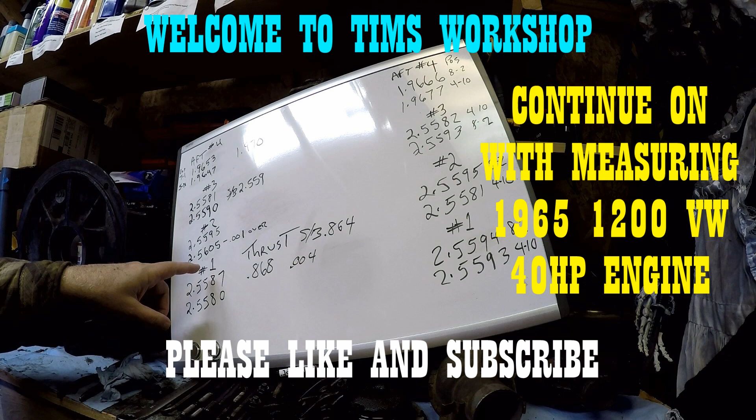We went through and measured the main bearing bores. We need to torque down the case because that's the way it should be done - when they originally bored this thing, they had the case torqued. I'd seen videos too, and was practicing measuring the bores, but I noticed my measurements were kind of goofy. So I remembered you really need to torque these cases down before taking measurements. I did that, and now I've got the measurements written on the board, so we'll go over that. You guys can see how I'm measuring these - I'm using a micrometer and a telescoping gauge, which isn't like using a professional bore gauge tool, but it gives me confidence on where we're at as far as these bore sizes and how to proceed.

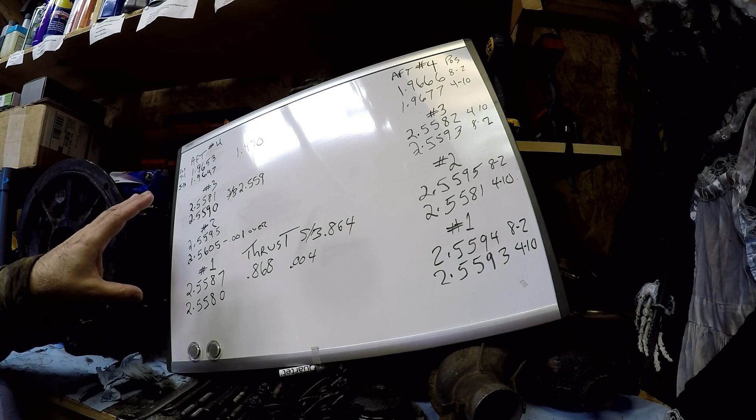We already went through these numbers. I changed this one because I had it wrong - this is actually over by 1/1000ths, which is no big deal, but again, the case wasn't torqued. So what I did to torque it: these 6 main bolts here, I torqued them down to 27 foot-pounds, but make sure you look it up so you know for sure. And then on the front end where the forward bearing is, there's 3 smaller diameter bolts up there that I torqued to 18 foot-pounds. So it was snugged up good, and the bores should be round.

This is what we got, and so we'll compare the two. On the number 1 bearing, here on the flywheel end, we have 25594 and 25593 - it should be 2559, right? So we got that, these are the last digits. Doesn't really make a whole lot of difference on these little numbers here, unless you're off on these - then it does make a difference.

So what we had was 25587, 25580. After torquing this down, the number actually got higher. That means the bearing was in a little bit and not spread out around - that explains it. Also, when I took the measurements, I was taking them at the 7 and 1 o'clock position, and 5 and 11. I changed it over - went to more of a crisscross pattern without hitting the oil hole and the dowel pin hole, from 8 and 2 o'clock to 4 and 10 o'clock. Now our numbers are actually looking really good since I torqued the case down.

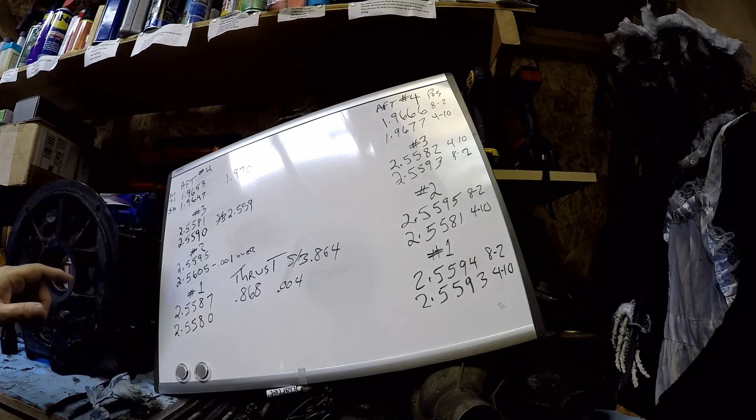Well, the numbers are higher now, which is good because we're closer to the target number. Putting the bolts in by this bearing, the smaller bolts, and torquing them up to 18, somehow my hole size got bigger. It's round now, right, so that explains why it's bigger. You want a clearance of about 2 to 3 thousandths between your bushings and the bores, because oil's got to flow through there.

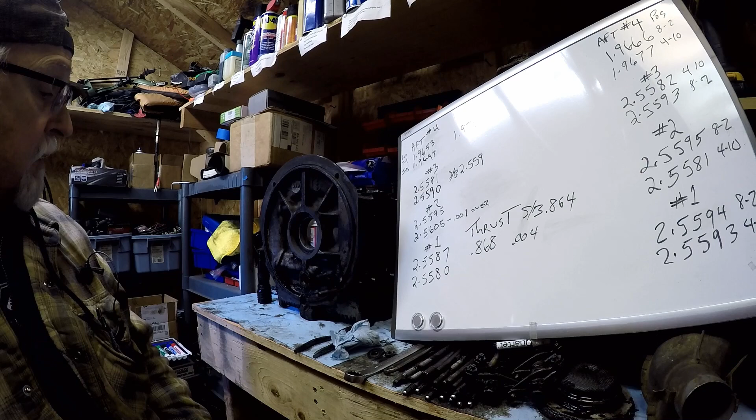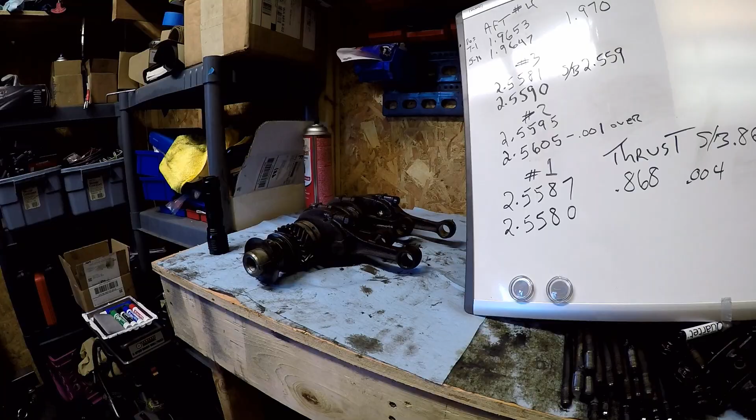So that's what I wanted to go over, these numbers. Now that we know our numbers are better, we're going to get this back off, put it in the stand for now. We're going to take it back apart and clean it better, of course. We're going to get the crankshaft up here and start taking it apart, get the bearings out, and start taking measurements on the crank. On the aft end of that crankshaft, I've got to get that tool to remove the crank gears off. That tool I can get at a fairly good price. Now it's time to start taking some stuff apart here.

Okay, got that out. Got the splash guard off. Got the little crummy bearing off.

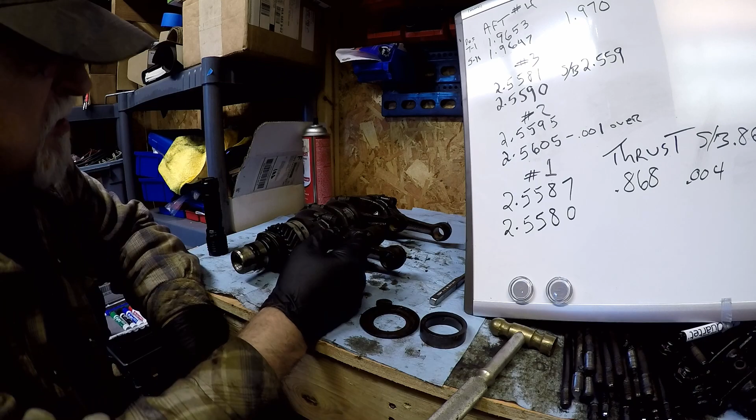Okay, now we're going to take these off. As far as I know, these are all the same length, so it doesn't matter which way they go, other than the fact that this is a match set. The lower cap and the rod, you've got to keep them together, with the bolts. Oh yeah, that works better. There we go. Okay, there's one.

Okay, got that one. That's got a number on it. Has 108, and this is 108 - match set. The reason they do that is they cut this, and once it's cut, these pieces have to stay together for them to work together. If you get them mixed up, they're not a match set anymore, which will cause you problems.

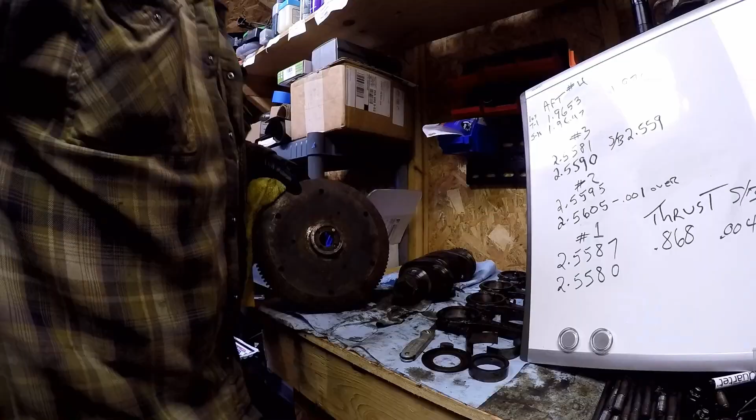Crankshaft is now taken apart, except for the gears. So there is an issue here. These pins on this end of the crank are larger than these pinholes. These pinholes look like a 3/16 diameter, and these look like almost a quarter. This flywheel is not going to work, even though it is a 6-volt flywheel. I'll contact the guy I got this motor from, because he had some other flywheels, so I'll ask him if he has one that matches this crank.

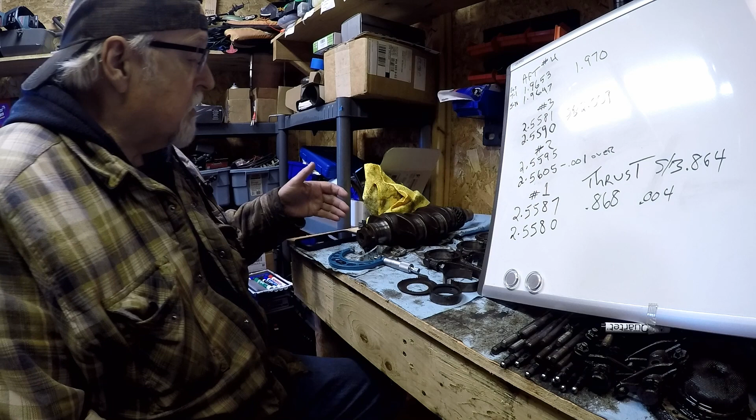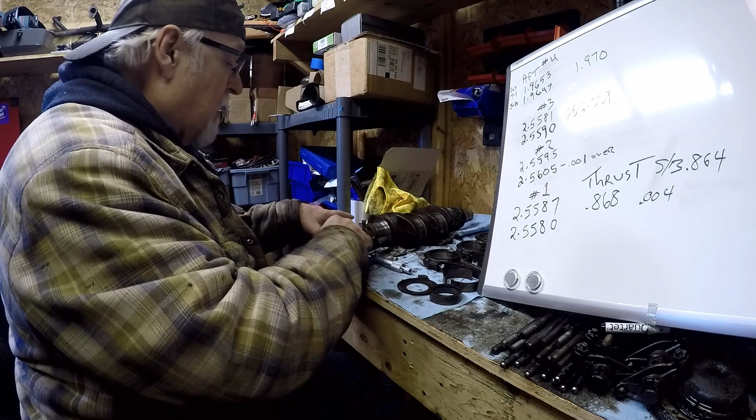We're going to go ahead and measure these journals. This is the first one, so we'll measure it, then the center one, and the end one we can't measure because we've got to get that tool. Let's look up what this is supposed to be.

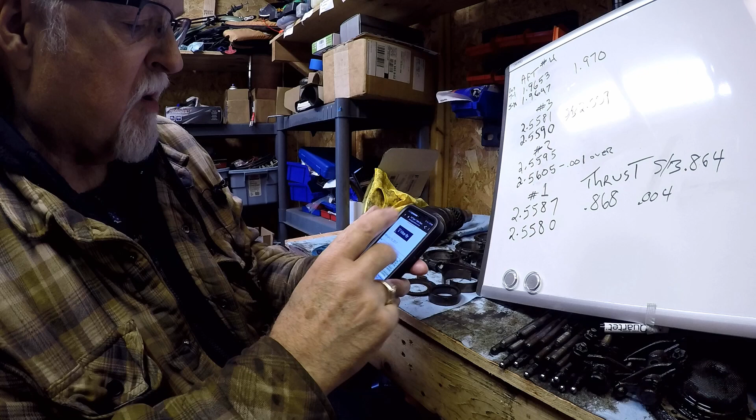Okay, I pulled up the Type 1 main bearing specs off of J-Bugs. It has the information here. Crank measurement should be 2.164. Okay, crank should be 2.164. So, number one, let's see what we got here.

Two, 1, 25, 50, 55, 60, 65, 70, 1, 2, 73, and the last digit is 1. Should be 164, and we are 9 thousandths higher than that.

Let's measure this again, just to make sure. Okay, so we have 2.1, 25, 50, 60, 61, 62, 63, 64, and the last number is 3.

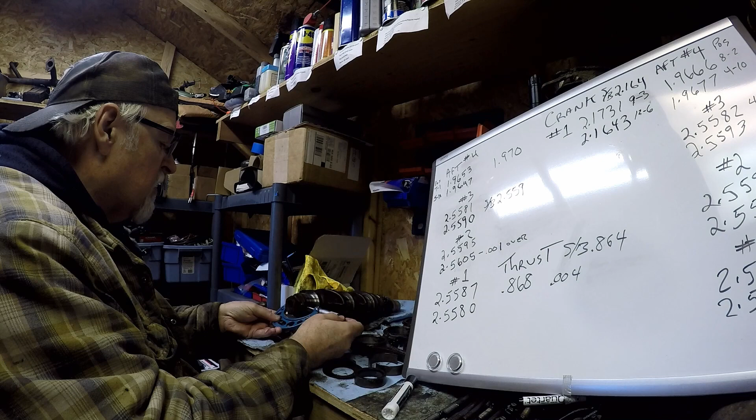Okay, let's measure this other one again, at the 12 and 6 o'clock position. What's this other one up here, at 9 and 3? Let's measure the 9 and 3 position again. When you measure this, you use this clicker here - it's gentle, you don't want something too hard on it. When you do this, you go back and forth and find the tightest spot in the middle.

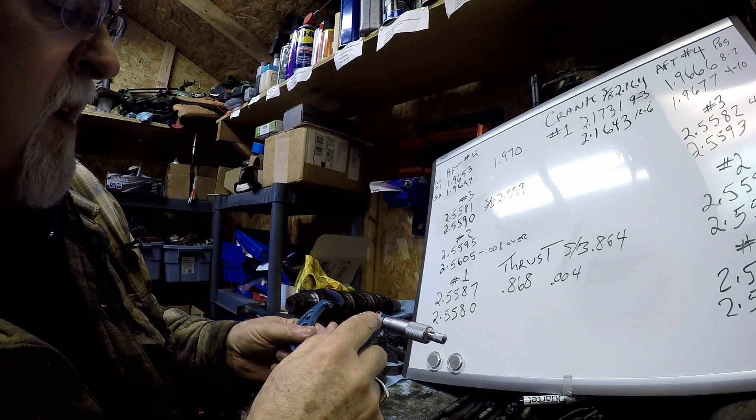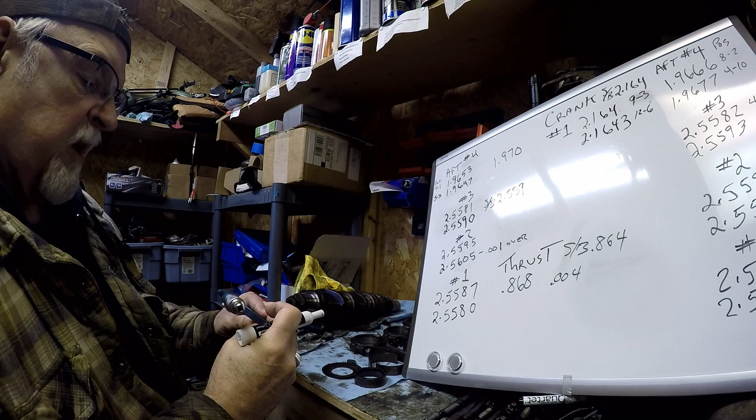We have 2.1, 25, 50, 61, 62, 63, 64. Alright, so we got a better measurement this time - 64.8. We're going for number 2.

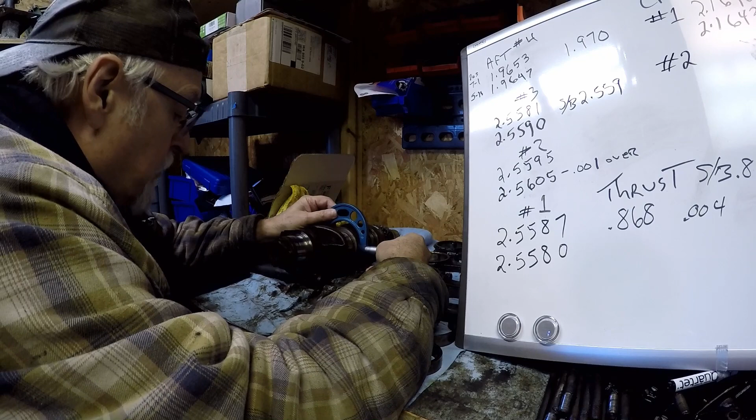9 and 3 position. I might have to stand up for this one to make sure I'm in there in the middle. 2.1, 25, 50, 60, 1, 2, 3, 64, and the small number is 6. Let's do the 12 and 6 number.

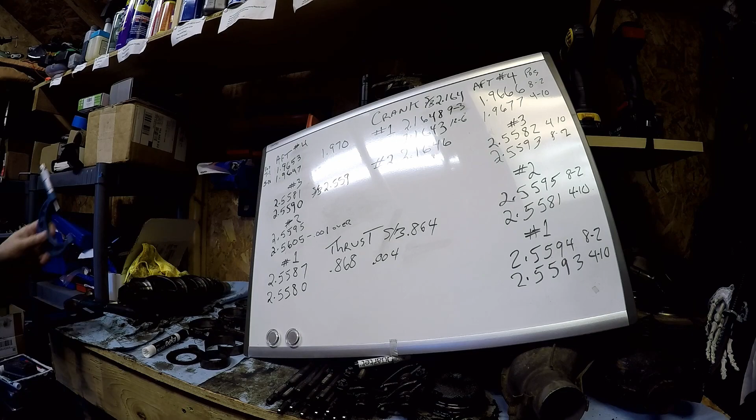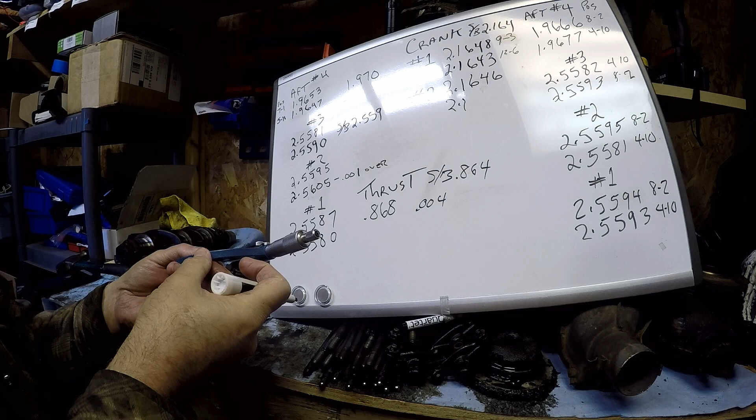2.1, 61, 2, 3, 4, 64. Small number is 1.

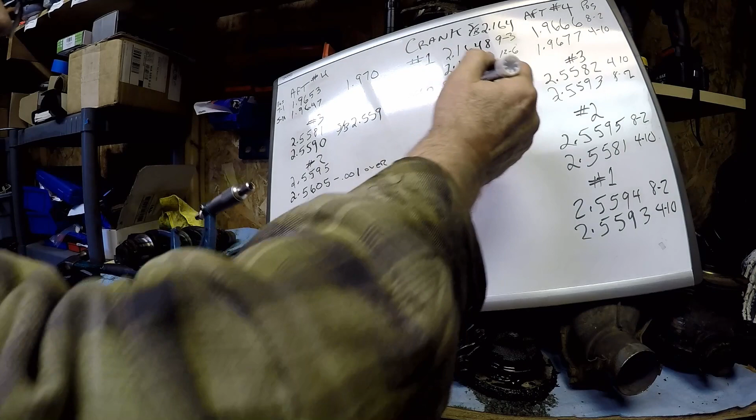I'm going to measure that one again. It almost looked like I was on 165 there. So let's check it again.

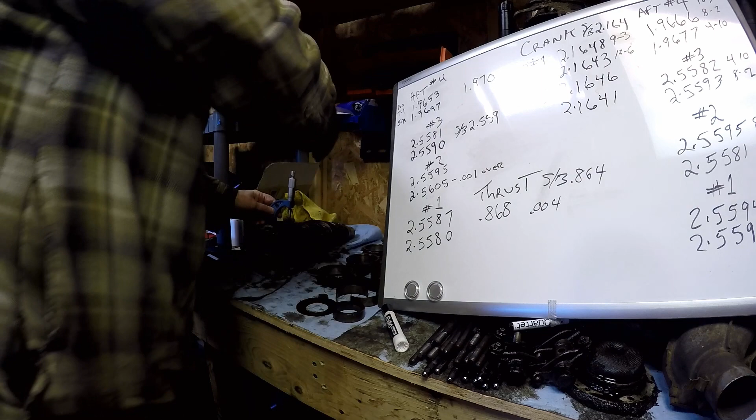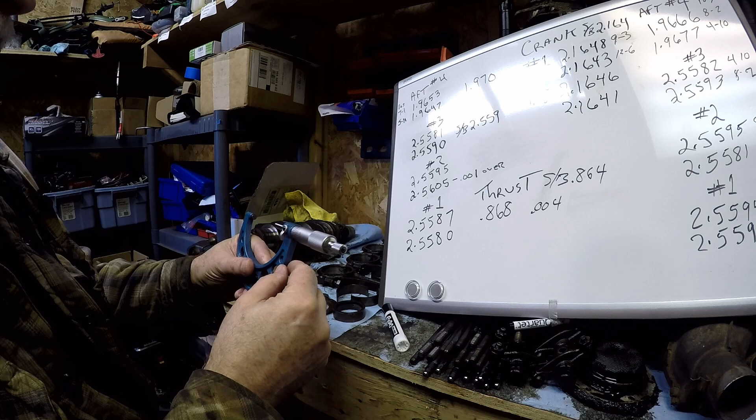Yeah, there we go. So definitely 64, and what number? Small number 8. Okay, so we're okay on the numbers.

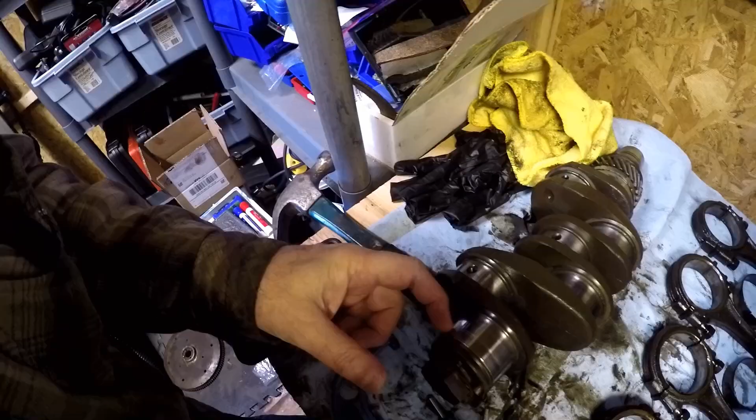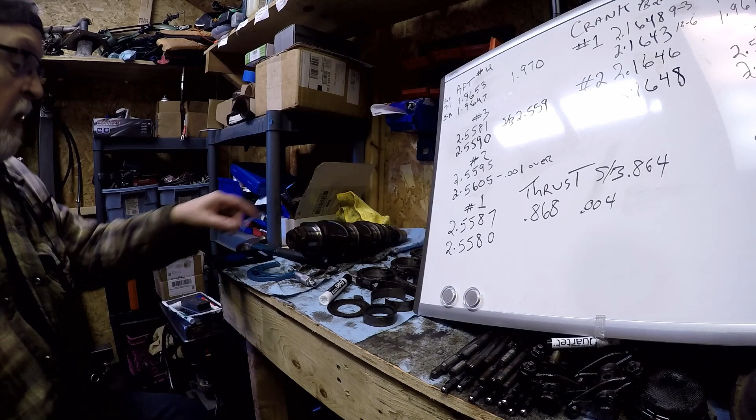But we need to polish this up because it feels rough. I can drag my fingernail across here and I can feel it. We're going to polish this up and then recheck the numbers again and see if we're okay. Right now we're okay, but this really needs to be smoothed up. So we're going to smooth it up, but I'm going to wait until I get this other end off to do that.

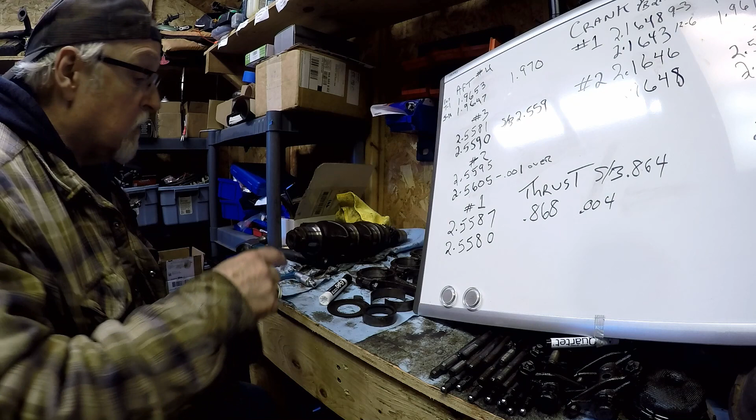We want to check the rod journals. So let's put the thrust measurements down here so we can continue on with the rod journals.

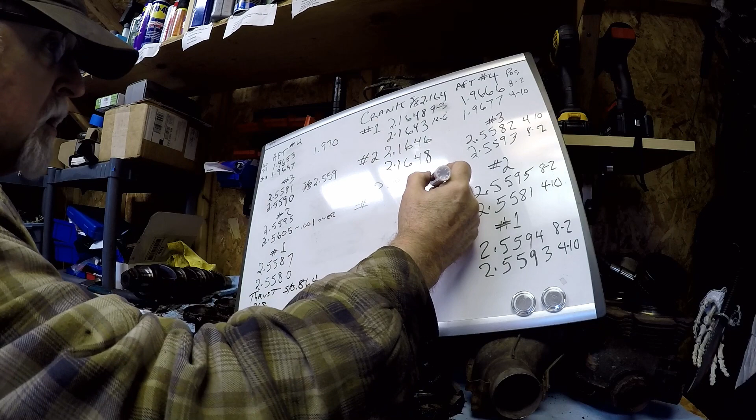All right, so thrust 868, 864 point, and was 868. So number one, first we'll put rod journals, and should be, rod journals are 55 millimeters.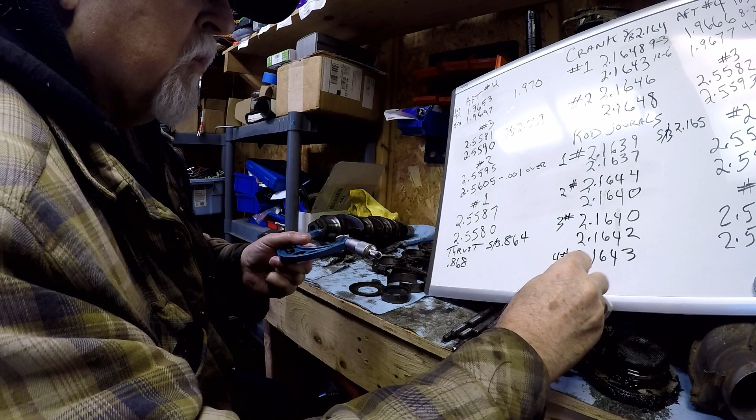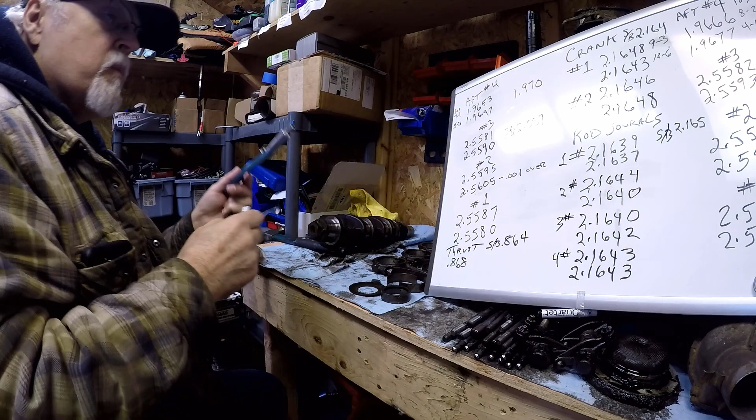2.1643. Wow. So since I'm getting better at it, let's go back up the top one up there and do it again. There we go. Yeah, I'm getting better at it.

Yeah, these things are touchy. You gotta be really good and be square. Make sure everything's clean, you know.

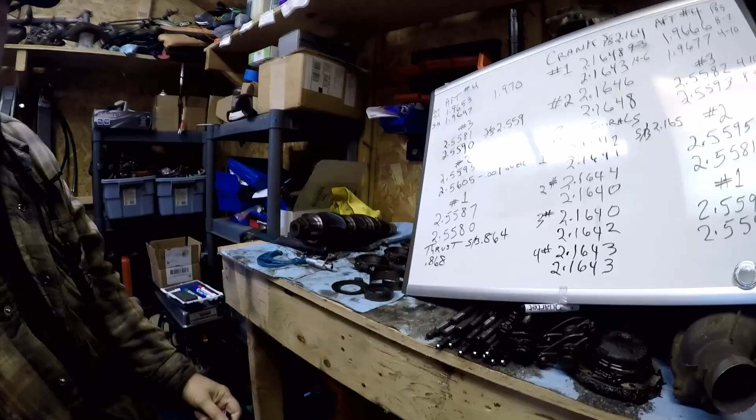So 61, 62, 63, 64. 64.2. Measure it again. 64.1. So what do we got here? We're consistently at 164, which is basically what the crank is.

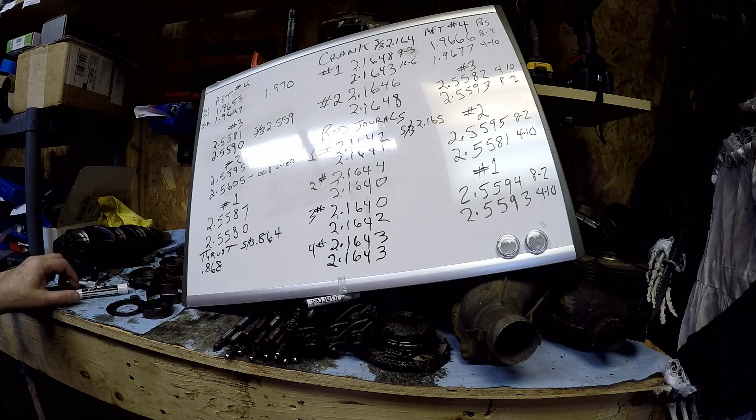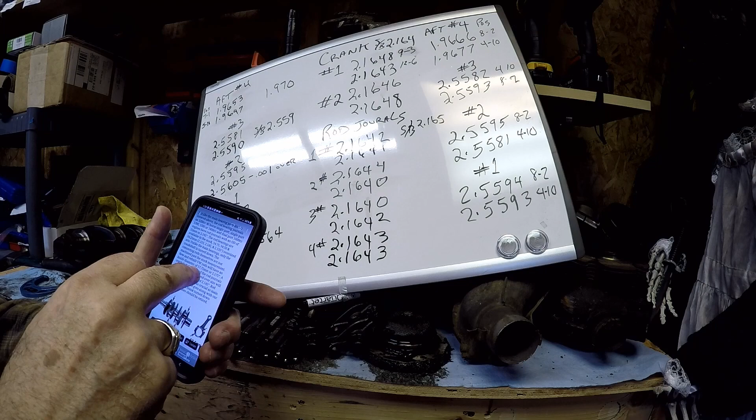So they're all about the same, although in the book, well, on my phone, right? So 1200, 1300, 1500, 1600, 40 horse, 55 millimeter or 2.165. Rods will have the inside diameter of the 57.75.

All right, so I took the con rods in the house and measured all of them and wrote the measurements down on the board here. The number 2 con rod, I didn't take the bushings out, and I'm going, why is this so small, you know? And then it dawned on me, oh, because you can't really tell. These con rods, the bushings are dark. Until you take those bushings out, you don't really see the inside very well. And I got all the measurements down here, okay?

And the measurement is supposed to be 2.2755 to 2.2760, right? So we'll look at this one.

Okay, this is a good measurement, except it's a little under. It's supposed to be 275.5, right? That's a little undersized, but this one here is pretty wide. It's like 3 thousandths wider. And then number 2, same thing.

And these measurements here are at the 2 and 8 position. These measurements here, where it's pretty close to being right on, is the 12 and 6. Something going on with the side measurements. Let me show you here.

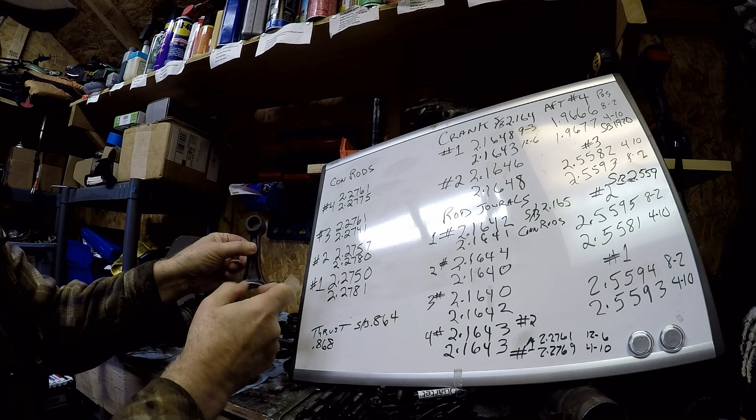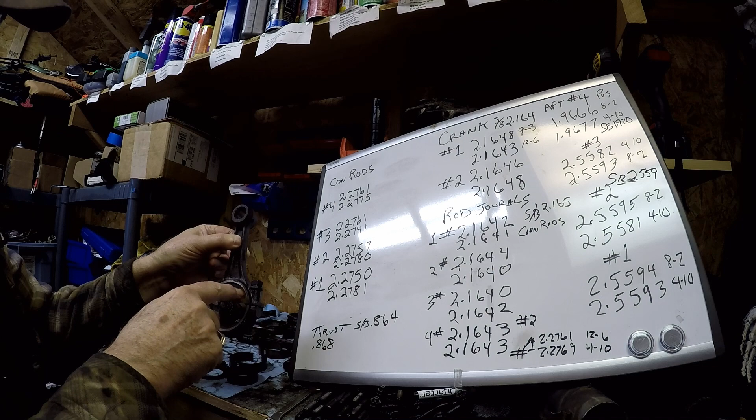So this would be the 12 and 6, 2.2750 and 2.2757 on both those con rods, which is good. But when you go down to 8 o'clock to 2 o'clock position, it gets wider. Now, is that a big deal?

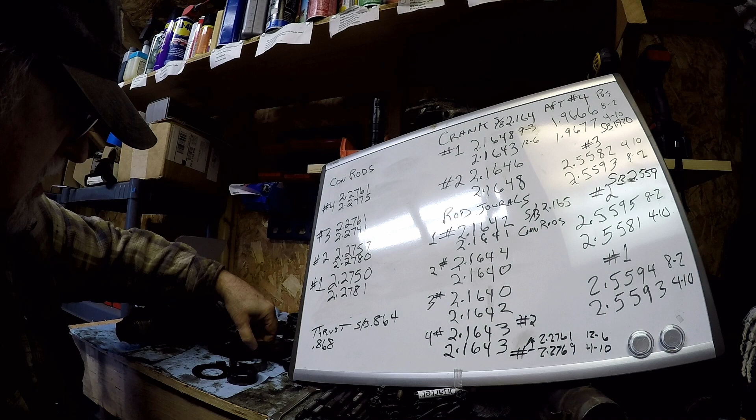I don't know. My opinion is get the new bushings, right? Put this together on the crank and try it out. And if these things spin like they're supposed to spin, we're good.

Okay, I got this figured out now. It was confusing. JBugs wrote down what the con rod is without the bushing in millimeters, and then next to it they put down a measurement that didn't make any sense because the measurement was supposed to be with the bushings in. So I got to figure it out.

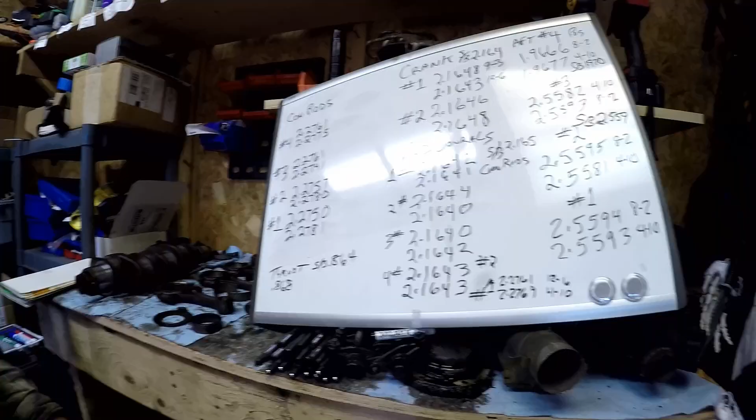So I put the bushings back in, and I measured it on number 1 over here. Let's turn the camera around. Okay, we're looking at these measurements here.

Forget about the bottom one. 2.2750, all right? With the bushing in at that location, this is what we got. 2.1, 100 thousandths difference, okay?

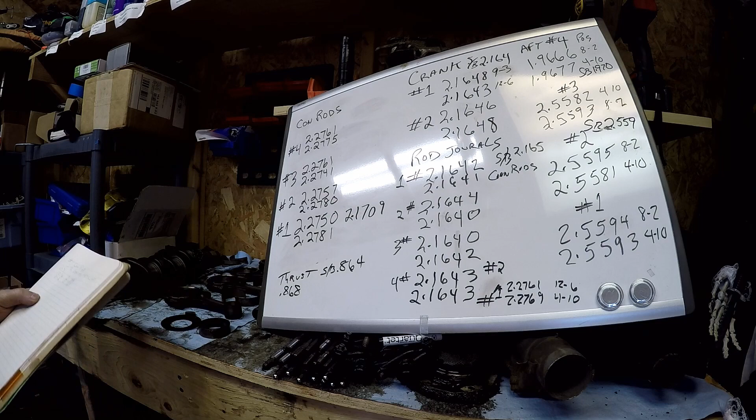709, almost 71, all right? So there's basically 4 thousandths difference between these, okay? And then we measured at the 8 and 2 position, so to see if it's even close to this one here.

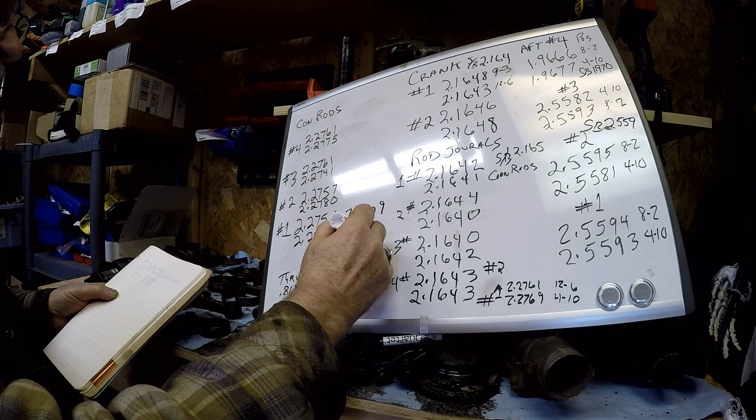2.1728, 100 thousandths difference. So when you put in these bushings, I measured them just roughly, you know, and it was 60 thousandths, you know, but I'm measuring it on a curved surface, and my micrometer is flat ends, so got to take into account for that. So I just rounded it off at 100. It's probably more than that. And I was just in the house trying to look it up to see what the thickness of these are supposed to be. I don't know if it's written on there or not.

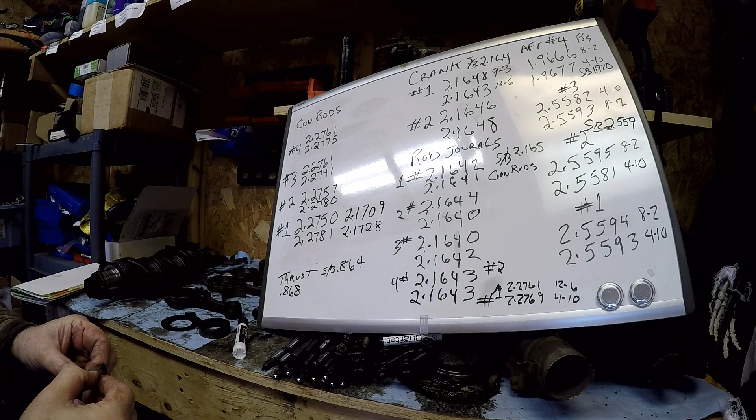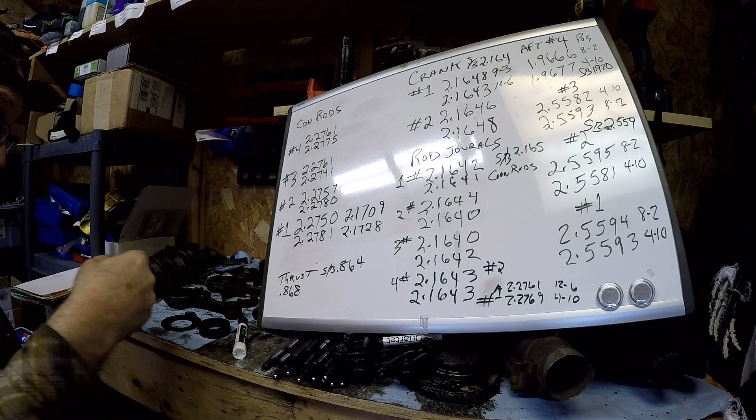These are old bushings, so they're worn down. A thicker bushing would, I believe, make these numbers closer. So you look at this number over here. This is the journal, right?

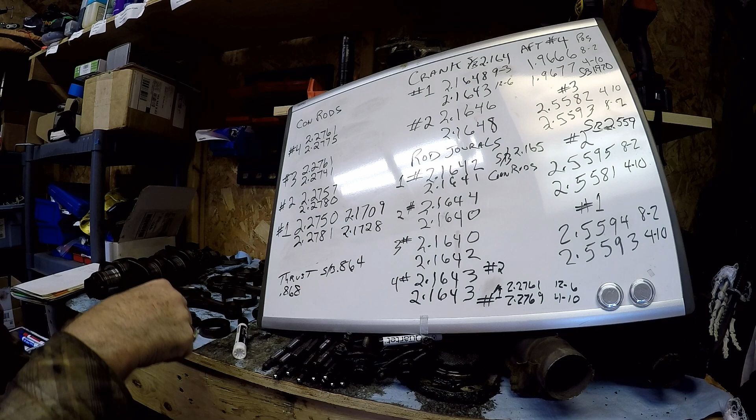So you got 164, with the bushing in there as it was. Let's do some math here, let's do the top one. So 170 minus 164 equals 6 thousandths tolerance, and these are old bushings.

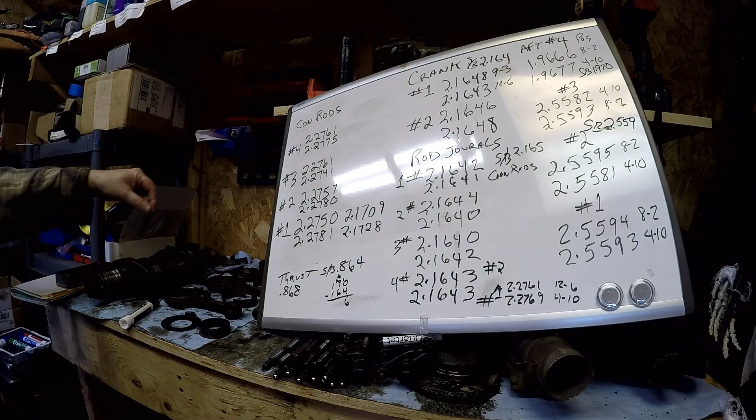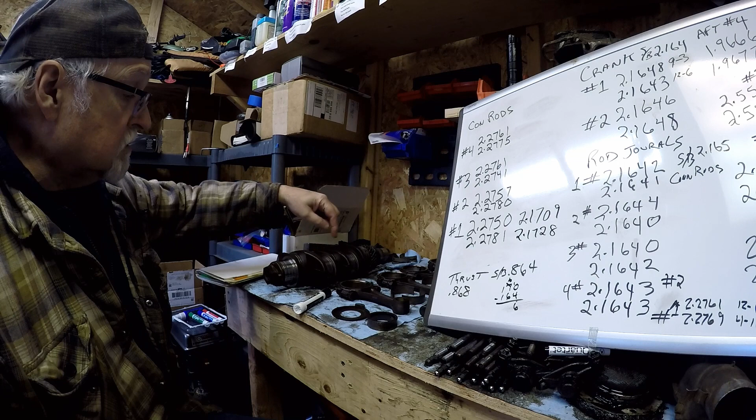I hate math, not my thing, I don't like math, I don't like numbers. But in this, yeah, you have to do it to know where you're at.

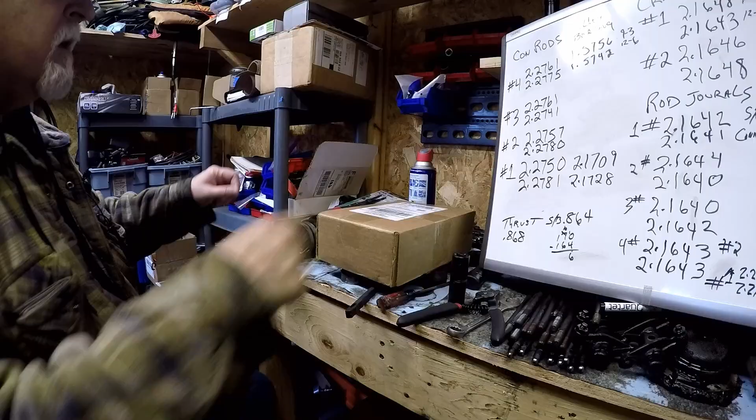I got the puller, and I also got some lock ring pliers, the right ones to get the lock ring clip off. So let's see what this puller looks like. Got this from California.

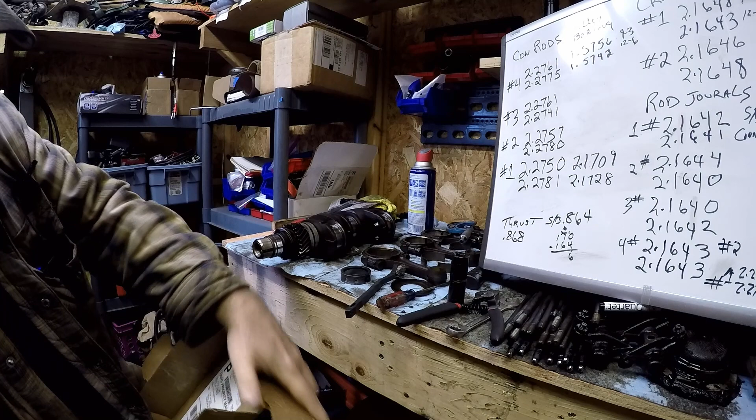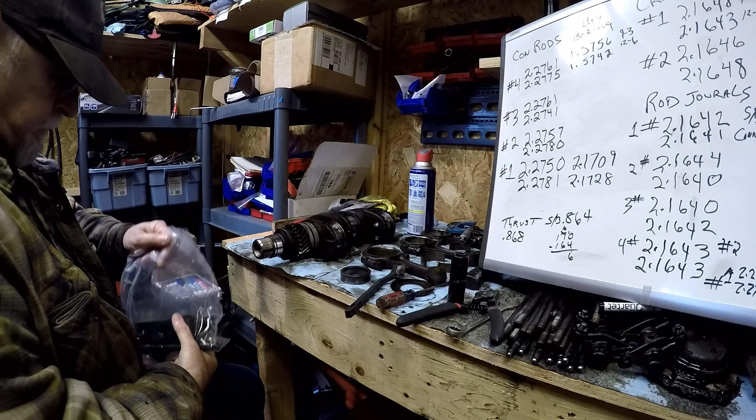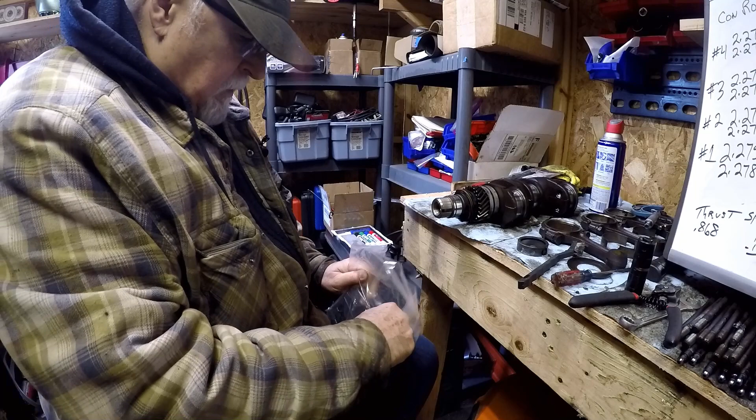There we go. All right, some assembly required. It's got oil on it, so that's cool, but every time you go to use this, it's recommended that you put oil on it. Snug that down. Snug that one down. All right. Now let's get this thing off.

Okay, got the ring off.

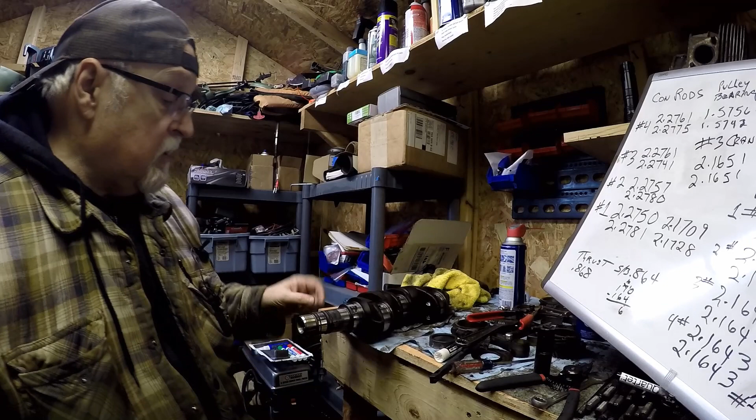So I got the last one off, measured the bearing. Measurements for the number 3 crank journal are 2.1651, 2.1651, and 2.1651. That was at the 3 and 9 position in both the forward and aft part, in 2 different spots, and then at the 12 and 6 at 2 different spots, and it came out perfect, 2.165. The crank should be at 2.164, which means there must be another number that's pretty high there, so it's in the range.

I'm going to get the book. I'm going to polish up these crank journals and the rod journals on the crank. I'm going to get it all polished up, cleaned up, and then I'm going to remeasure it with the book in front of me so I know exactly where I'm at on the tolerance on these.

If I'm even close, slightly out of tolerance, I'm going to go with it anyway, because this is a budget build. This isn't something I'm going for a performance type engine, this is just an old stock engine, so we're doing a refresh on it basically. As far as how long it's going to last, I don't know. If it's something that isn't right, I will not sell it, I'll keep it for myself. If I get a VW car that needs an engine, I'll put this in there and run it myself. And if it blows up, then it's no biggie, I'll just put another motor in it.